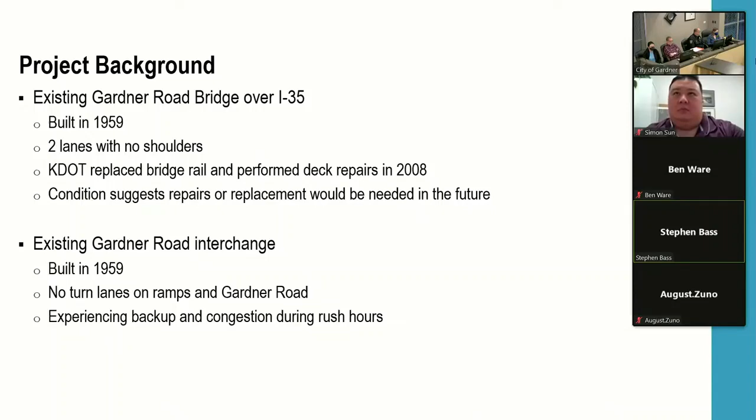As I mentioned earlier, it's a narrow 2-lane roadway. There are no turn lanes on the ramps or Gardner-Road, and currently the area experiences backup in peak hours, particularly the southbound I-35 to northbound Gardner-Road movement in the morning, and then in the PM peak hours, where heavy traffic movement is from southbound Gardner-Road to northbound I-35.

Moving on, some additional project background, if anyone doesn't remember: the city had applied for some MARC funding to replace this bridge, and back in February 2019, MARC awarded $6 million towards construction of this project. KDOT agreed to participate in the preliminary engineering for the project. And so, as Tim mentioned earlier, preliminary design or field check plans are about 50% complete. We held that meeting back in December of last year, right before the holidays. And so right now, the final design is ongoing, including we're getting ready to start the right-of-way process, as well as the utility relocation process.

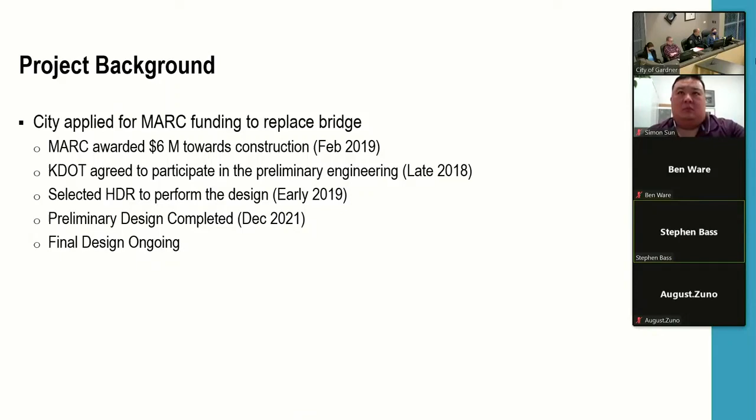So here's kind of where we're at project schedule-wise. You can see here, we're at the preliminary design, which ended in December of 2021. So now we've rolled into the final design activities, which includes final design, right-of-way acquisition, and utility relocation. Currently, the project is scheduled for letting in September of 2023. So we have that on track for September letting of 2023.

So with that, I guess I'll just go ahead and turn it over to Simon and let him discuss some of the more specific details about the interim improvements as well as the ultimate improvements for this area. So go ahead, Simon.

Simon, you're on mute.

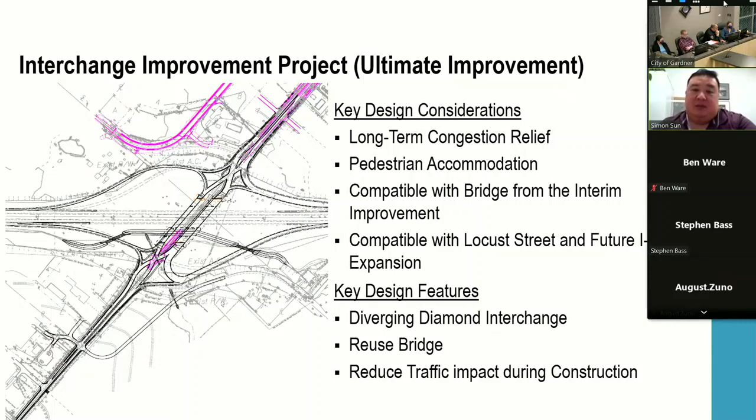And some of those increases in cost were due to the amount of pavement to the north as well as to the ramps. As we've been fine-tuning this design, we've been adding some additional pavement, and we've also been fine-tuning some of the bridge costs. But also, I will say that KDOT is seeing an increase in unit prices on all projects that have been let recently, and so a combination of all those things has led to a slightly higher cost than what we presented last year.

The preliminary engineering and construction engineering costs are simply 10% of the construction cost estimate. And as far as right-of-way and utility relocations go, those values remain unchanged at this time. We just don't have a good handle on the right-of-way costs. We are in an urban environment, and it's tough for our KDOT right-of-way staff to come up with good dollar amounts because we've got a lot of business owners, and until we get into the right-of-way process, such as appraisal and acquisition, it's tough to say at this point.

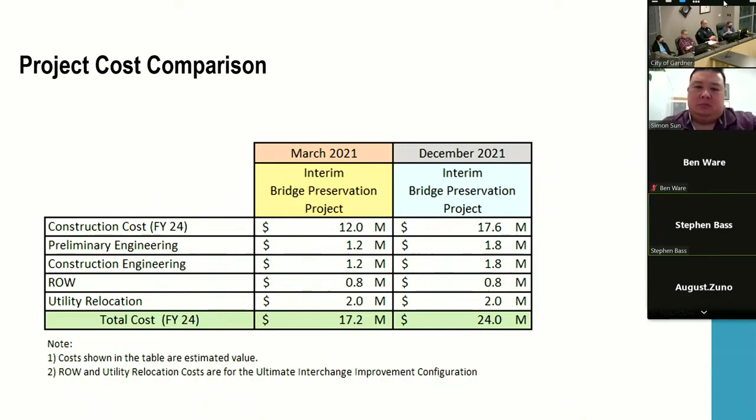So with this project, like I mentioned earlier, there was $6 million of MARC funds that were obligated for 2021 and 2022. Well, because we couldn't get the plans designed and let the project in that time frame, KDOT reached out to MARC about doing a fund swap. So what ended up happening was, and I'm not sure if Ken has shared this information, the MARC federal funds were removed from the project so that that $6 million could be used on other projects in the region. And KDOT will then use KDOT federal funds to make up that difference. So the $6 million we're showing as MARC here, but there was a fund swap.

There was $1.5 million obligated by the city. And then in a meeting a while ago, KDOT said that we would take care of the additional costs for construction for that project. So as it shows here, the funding source: $6 million in MARC money, $1.5 million for the city, and then $10.1 million for KDOT.

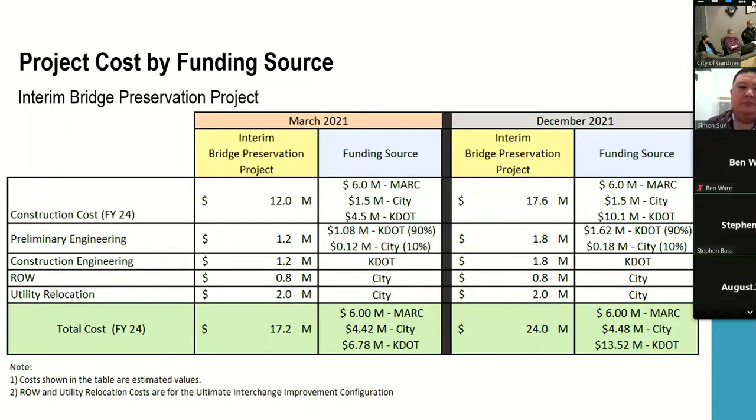KDOT is drafting up a city-state agreement for this project, and once we get a draft put together, Tim, and I don't know if Kellen's there or not, but we will reach out to you guys and share that draft with you to get some back and forth on the comments to get that hopefully approved fairly soon, and what you see here will be captured into that city-state agreement as well. So with that, I will open it up to questions.

Thank you. Why don't we start with council, and you might want to say your name before you speak. So, questions, council. I think Council President had a couple of items he wanted to bring up.

My main thing is that I'd like to hear how this current plan works with the existing businesses. Looking at the map, we've got this two-phased approach to this overall bridge deck, and my main concern is on that north side where we close that access to the convenience store on the west side. And Olathe Health is on the east side there. What are our options, what are KDOT's restrictions as far as providing access to all those businesses south of 188th Street?

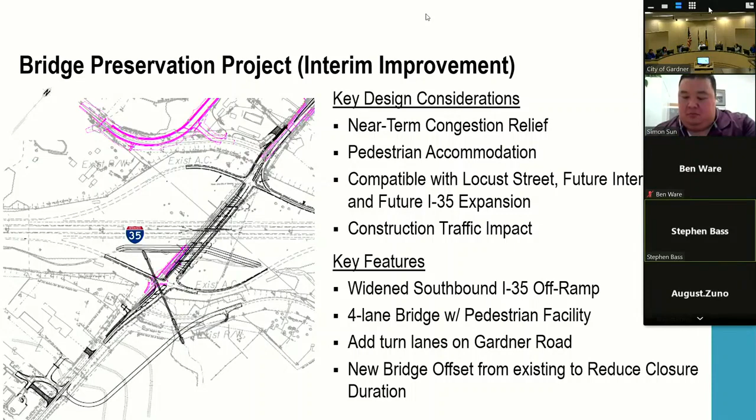Okay. Simon, I think now would be an appropriate time to share some of the additional information that we didn't have included in the presentation. Yep, and we can walk through. Bear with me, I'm going to stop sharing my presentation and open up some additional information that we put together in anticipation of questions tonight. Steve, slide 7, just to help with that a little bit. All right, let me know when you can see my screen. We've got it. Okay.

So some of the things the project team looked at for access considerations: one of the things we really look closely at is the KDOT access management policy. We looked at things like safety, efficiency, level of service or congestion, as well as the future development going on in the area. And with this project, as Simon mentioned, we are looking at preserving the ultimate right-of-way. Let me flip to the next slide.

Here's a blown up view of some of the access and what we're doing with the current access along the Gardner Road profile. We can step you through here. What you see on the screen is existing 191st Street, located just south of the ramp terminal. We're proposing to realign that south along Gardner Road. I believe some of this you've seen already when we presented back in March, even though it was higher level at that time.

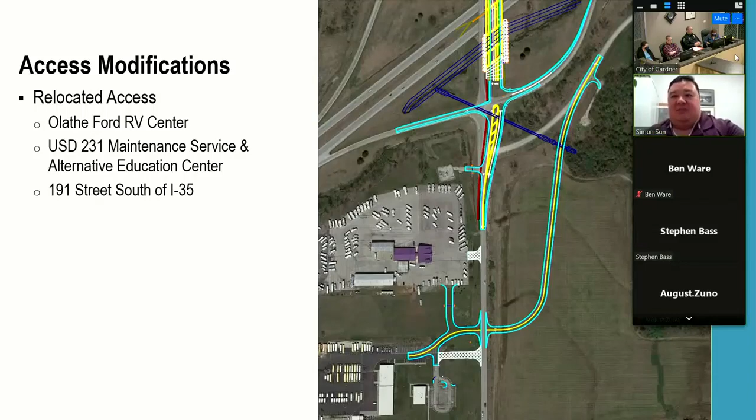Thank you, Steve. Steve, do I lose you? Sorry, okay, no—thanks, Simon.

What you see on the screen is the Olathe Health Urgent Care Center in the lower right corner. Just west of there is the Phillips 66 station, and north of the Phillips 66 is a new QuikTrip being constructed right now, which we didn't have the latest aerial imagery to show.

As it relates to the Olathe Health Urgent Care Center and the QuikTrip, as Simon mentioned, access spacing from the interchange to a full access movement is about 1,350 feet. The minimum distance for right-in, right-out is about 750 feet—is that right, Simon? Correct, 750 feet. The entrance to the QuikTrip and Olathe Health is just beyond that 750 feet, so we'll be providing right-in, right-out access at those locations. Unfortunately, the entrance at Phillips 66 is only about 350 feet north of the interchange ramp terminal, which doesn't meet our access management policy.

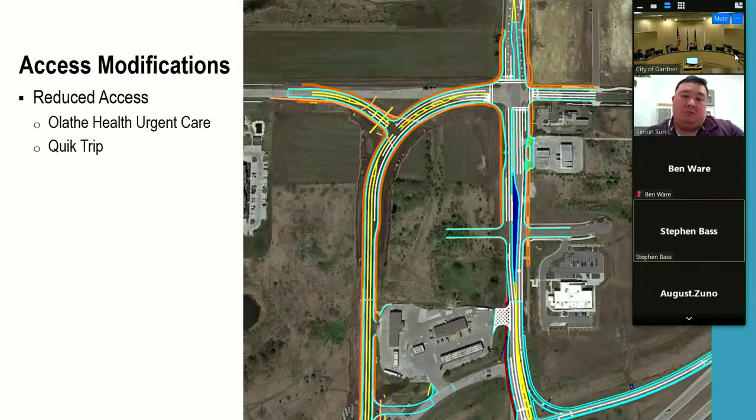Any questions? I understand policies, we all deal with them—what's the gating factor for why there are those numbers? Is it to reduce certain aspects of the design? I assume so, but what is it, so we can figure out how to address this and know what we need to focus on.

Okay, so here we prepared a slide for access modifications—a list of our considerations behind closing the access to Phillips 66. I don't know, Simon, do you want to take this from here, or do you want me to? Sure, I'll be glad to do that. Okay, good.

Steve mentioned earlier that the access management policy recommends right-in, right-out access be located no less than 750 feet from the ramp terminal. In this case, it's about 350 to 400 feet to the existing entrance.

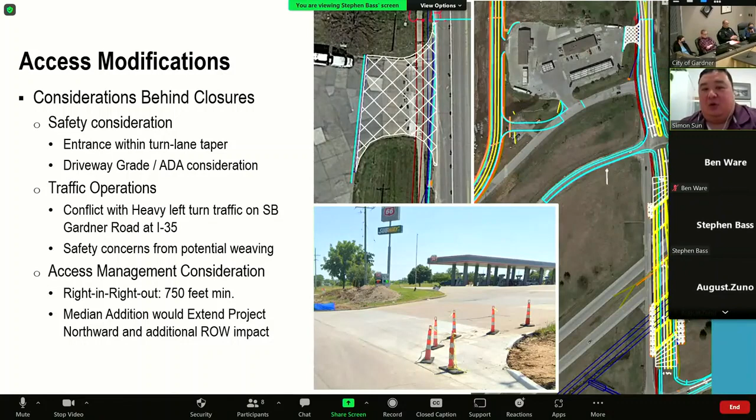Policy aside, we look at it from multiple angles, including safety considerations. If you look at the blow-up view in the upper left corner, that entrance is in conflict with the left turn lanes being implemented for the southbound left turn onto northbound I-35. Anytime you have multiple actions going on—people making a lane shift to get into a right turn lane, coupled with conflicting movements from a side road or entrance—that's not a preferred situation. There are safety considerations for having that conflict in the same area.

The second element from a safety perspective is the picture in the lower left corner—a recent picture taken during construction showing some driveway reconstruction that took place with the Locust Street project.

Probably what I'm going to point to your attention is that, at least looking at the plans, there is no sidewalk continuation. This picture is looking towards the south end. So with this design, there's not a sidewalk continuation across the driveway to the south. You can notice that the grade there, if you were to think about a sidewalk projecting to the south, the cross slope would be steeper than what ADA allows, which is a maximum of 2% cross slope. You can take a look at this picture and get a sense that the driveway is steep, certainly steeper than 2% from an ADA perspective.

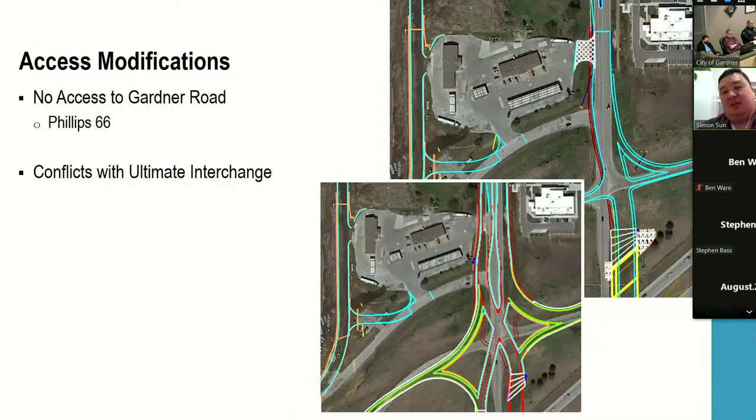So when you think about the way this intersection is laid out right in front of this driveway, there are 2 lanes going southbound in this area. But note that the left lane, the inside lane, is going to be a left turn only lane. That's a dedicated lane that'll transition to an exit-only as you get across the bridge, where the right through lane is the one lane that carries you south through the bridge to the south side of I-35. So you can imagine that with that much traffic expected to turn left for southbound traffic, that's an entrance at this close location - it's going to perhaps have some potential conflicts with the left turn movement.

More specifically, for a vehicle exiting the convenience store, the amount of people wanting to make a right out of the driveway and then turn left onto I-35 is potentially high. So those folks are going to be turning into the right through lane and then slowing down, trying to find a gap to get into the left lane. Imagine during rush hour traffic when people are trying to turn left and those lanes are full - that could potentially cause a slowdown for people trying to go south. It's just one of those things that is not preferred from a traffic operation standpoint, and could potentially lead to additional safety concerns for weaving and rear-ending accidents and things like that.

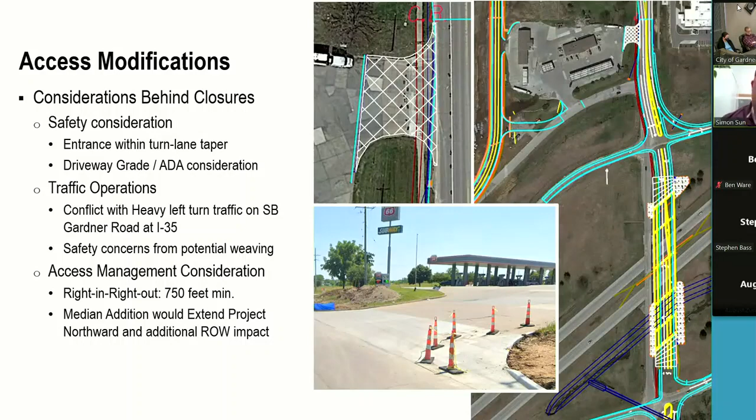Thank you for the detailed information. Can you go to the slide that shows 189th Terrace, or whatever we're calling that? Does it have a median where we don't have left turn operations there? And from the Phillips 66 driveway to the north, are there any additional opportunities for crossing traffic?

Yes, essentially. So in this concept, if you were to close the Phillips 66 driveway like we're discussing, there will be a continuous raised median to the north until you get to the full access intersection at Locust Street or 188th Street. We're preventing all left turn movement across Gardner Road.

So currently with this design, unless a road is built, you can't get up to Olathe Health without coming southbound on I-35, because there's no road coming on the east side. I understand what you're saying. Yeah, so the way it's currently shown, you're absolutely right.

One of the questions, I didn't know which councilman it was, but anybody traveling south on Gardner Road won't be able to make a left turn to Olathe Urgent Care. That said, that's something the design team has talked about extensively, and it's something we're planning on addressing through the right-of-way negotiation process, because removing an access like this would require additional discussions, and those conversations typically take place during right-of-way negotiation.

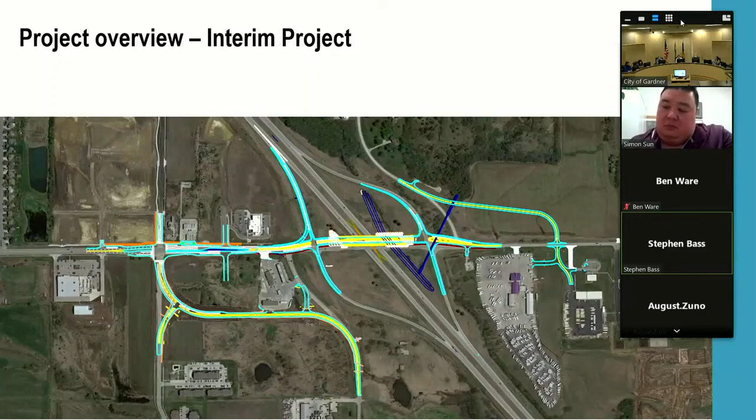So yeah, we have looked at that, and we've also prepared some slides regarding anticipation of discussion about that particular thing. So let me flip back here real quick.

What you see on the screen now is what we presented at Field Check back in December. After we presented this plan, we had heard concerns about the amount of closure time with our different phasing. So, Simon, would you walk them through what we showed them at Field Check? Then we can go over some of the things we're going to look into as we move into final design to help mitigate some of these closure times.

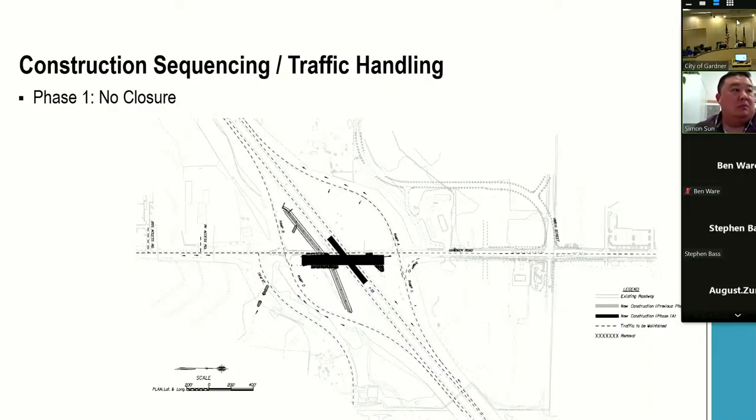Simon and Stephen, I apologize, I think we've got about 5 minutes left before our council meeting starts. So, okay, I guess in the interest of time, let me flip back here.

So originally at Field Check, we were looking at roughly a closure time of about 12 to 18 months. So what we're going to do is take a step back and relook at some of the construction sequencing. As it stood in the Field Check plans, we were constructing 191st Street later in the phasing. Now we're looking at constructing that early on, first. So we're looking at some of the sub-phases to help reduce the amount of time of Gardner Road closure, as well as interchange ramp closures.

Without getting into the weeds, there will be a time where the bridge over I-35 will be closed. That's going to have to be as short as possible, and I understand there's difficulties and we can only do what we can do, but with Olathe Health right there and a school on the south side of I-35, that has to be paramount, that amount of time is minimal.

Yeah, and like I said, one of the things we've asked HDR to do is go back and look at some of this construction sequencing again, to reduce it from 12 to 18 months to something a lot less. Now, we don't really know that time yet until we get down into the details of adjusting this phasing, but we hear your concerns and we understand.

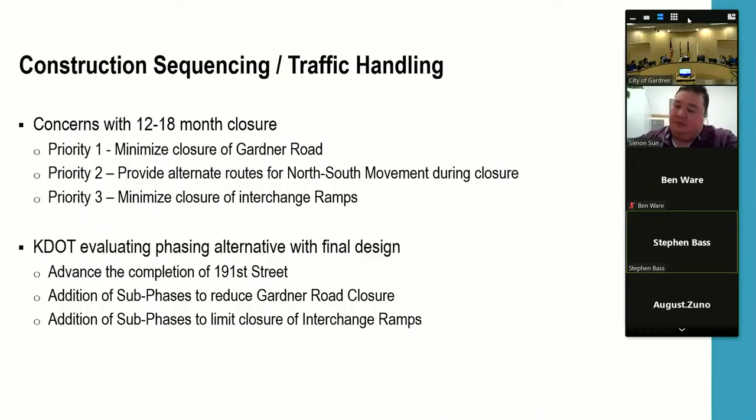Okay, that would be great, we'd be willing to do that. Like I mentioned earlier in the presentation, we have meetings set up with some of the business owners. So I would ask that Olathe Health and Phillips 66, if you would like to have some stakeholder meetings, please go through Tim and he will get a hold of us with open schedules, and we'd be more than happy to sit down and discuss the concerns with them, sooner rather than later.

Thank you, appreciate that. Thank you, gentlemen. Thank you. Okay, thank you very much. Have a great evening.